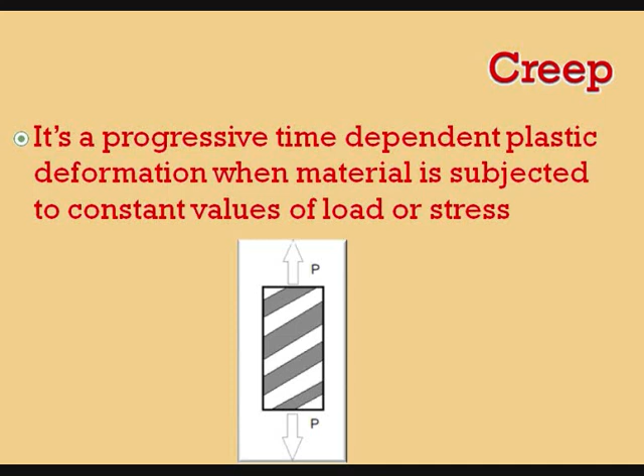Creep is a progressive time-dependent plastic deformation where a material is subjected to constant values of load or stress. This is a typical strain versus time creep curve. In the initial stage, that is primary creep, the strain rate is relatively high, but slows with increasing strain. This is due to work hardening.

The strain rate eventually reaches a minimum and becomes constant. This is due to the balance between work hardening and annealing, that is, thermal softening. This stage is known as the secondary stage or steady state creep. This stage is most understood. The characterized creep strain rate typically refers to the constant slope in the secondary stage. Stress dependence of this rate depends on various creep analyses.

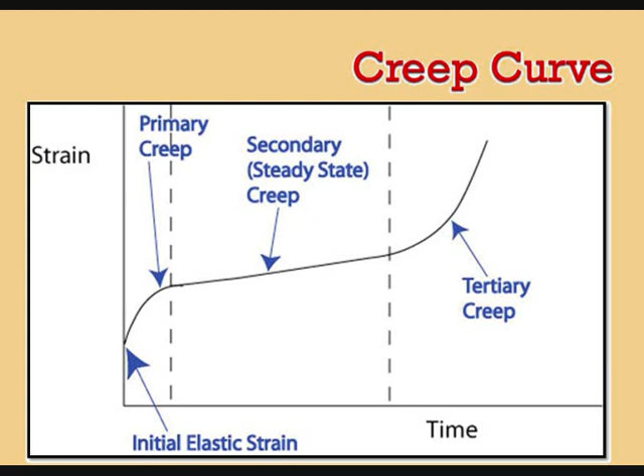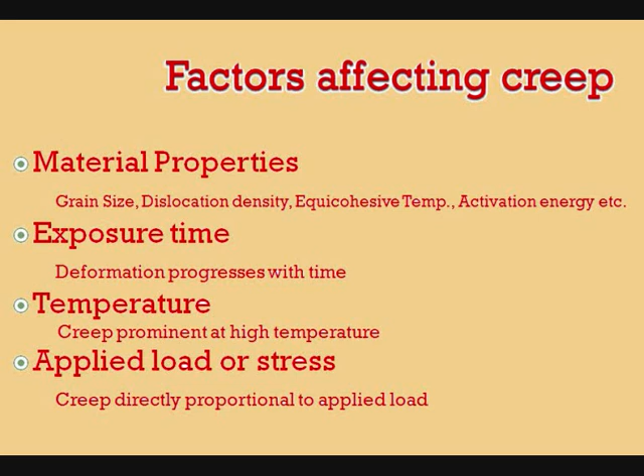In tertiary creep, which is of not much importance as far as practical applications are concerned, the strain rate exponentially increases with stress because of necking phenomena. This rate of deformation is a function of various parameters, which are as follows. First, material properties like grain size, dislocation density, equicohesive temperature, activation energy, etc. Second, exposure time. Third, temperature. Fourth, applied load or stress.

The effect of the aforementioned factors on creep can easily be elucidated through a mesoscale model developed on the platform Microsoft C++ Visual Studio. We considered the general microstructure of metals and alloys to be consisting of different types of obstacles which have varied strength defined by strength coefficient S and characteristic slip probability P. Simple rules as mentioned in the model formulation are used to ensure compliance with mechanical equilibrium and compatibility.

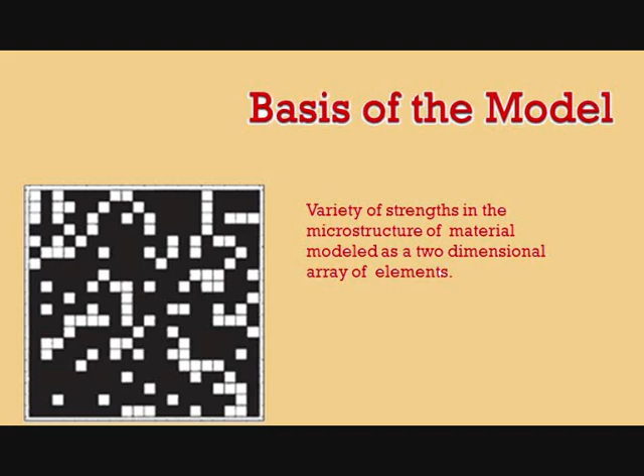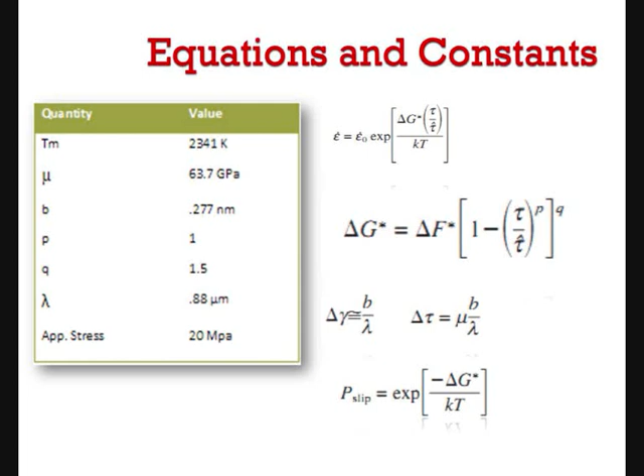The mechanistic details of the deformation do not have to be explicitly considered in order to develop a model for how metals deform in general. So this model acts as a black box where certain parameters and wisely chosen constants are fed into the Arrhenius activation equation dependent on activation energy barrier delta G, and graphs are generated by simulation for a particular metal alloy system.

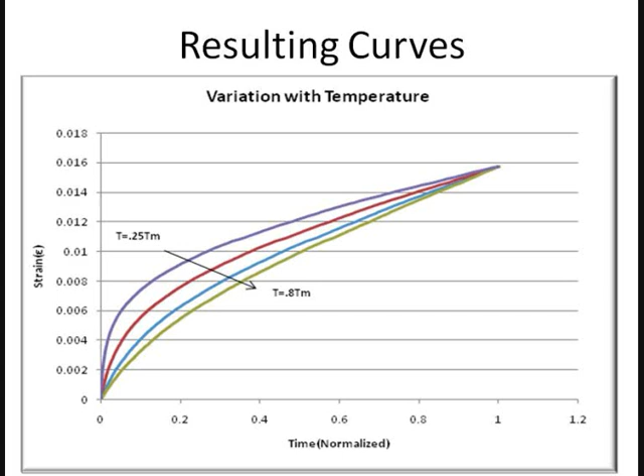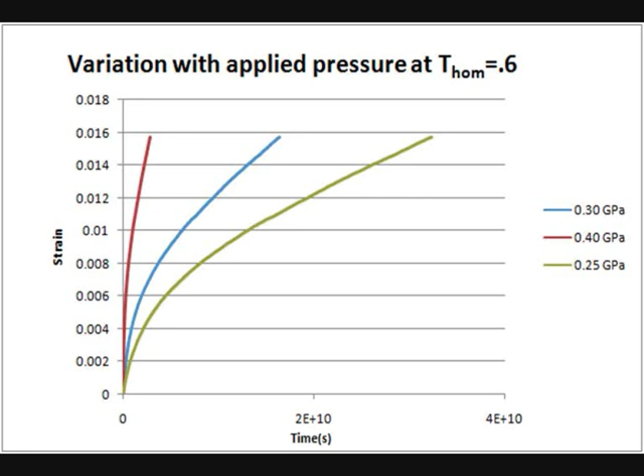Following are the results. The normalized creep curve shows as the homologous temperature increases from 0.25 to 0.8, the slope of the steady state region, and hence the steady state creep rate, increases, while at the constant homologous temperature of 0.6, the steady state creep rate increases with applied external load, exemplified by the following graph.

Since obstacle distance is inversely proportional to the obstacle density, grain size reduction can simply increase the resistance to dislocation movement. As the obstacle distance increases from 0.6 micrometer to 1.10 micrometer, which is analogous to an increase in the grain size, the steady state creep also increases.